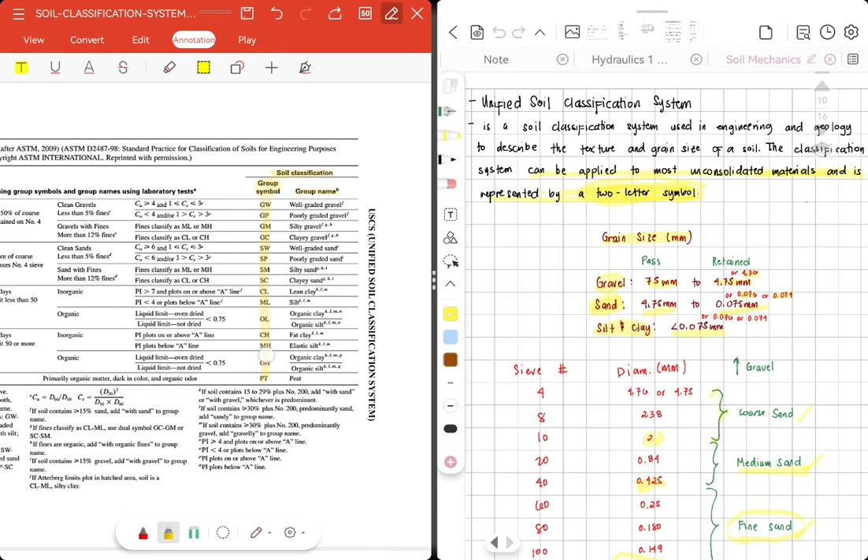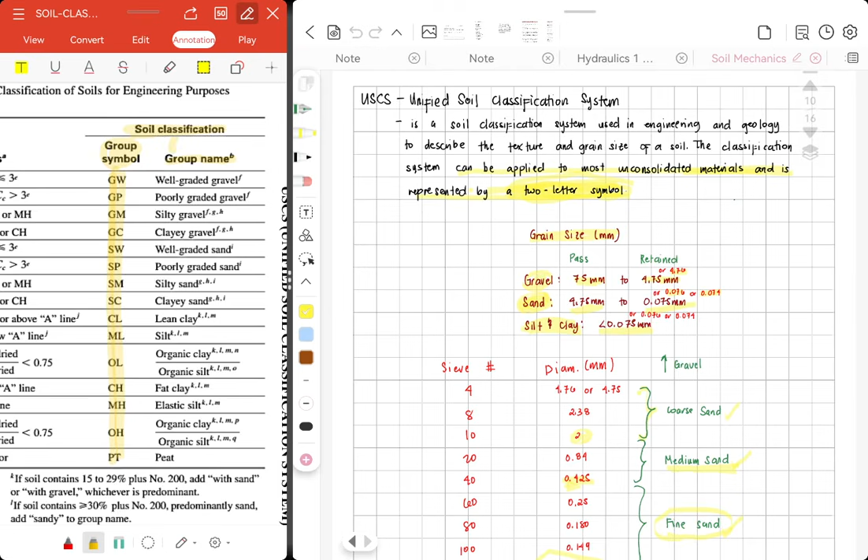So, sa USCS, ang principle ani niya is we have to find first the group symbol and then we can now get the group name. So, kaning group name, it is more specific than the group symbol. So, just like USDA, napud siya iyahang grain size. So, kaniyang grain size is different from USDA.

So, ang nanatay gravel ha, katong USDA kanina wala tay gravel. But sa USCS, nanatay gravel, sand, silt, and clay. So, if mo pass siya 75 mm and mo retained at 4.75 or 4.76, then that is our gravel. And then sa sand, if mo pass siya 4.75 and mo retained siya at 0.075 mm or 0.076 or 0.074, then that is our sand.

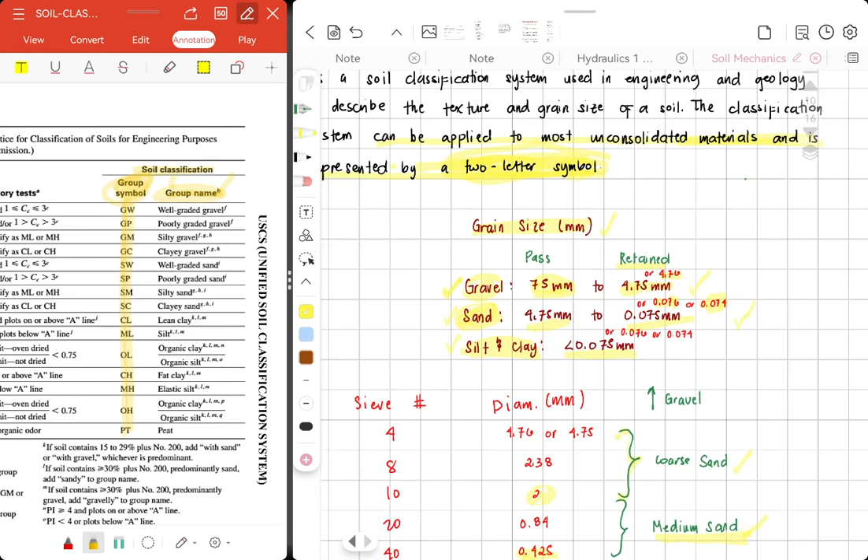For silt and clay, it is less than 0.075 mm. So most likely na siya sa atuang pan. So here is the sieve number and its corresponding diameter. So, naman tayo sand, diba? So, ang sand, it has three types pod, coarse, medium, and fine sand.

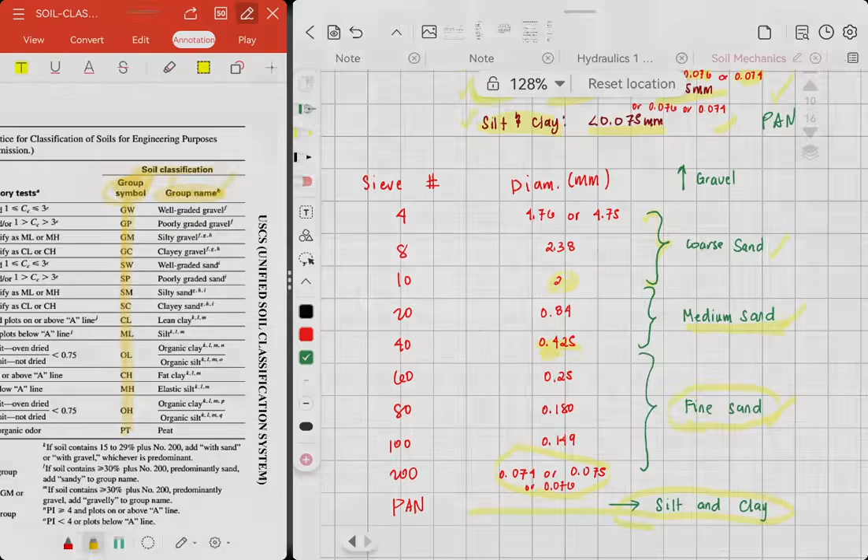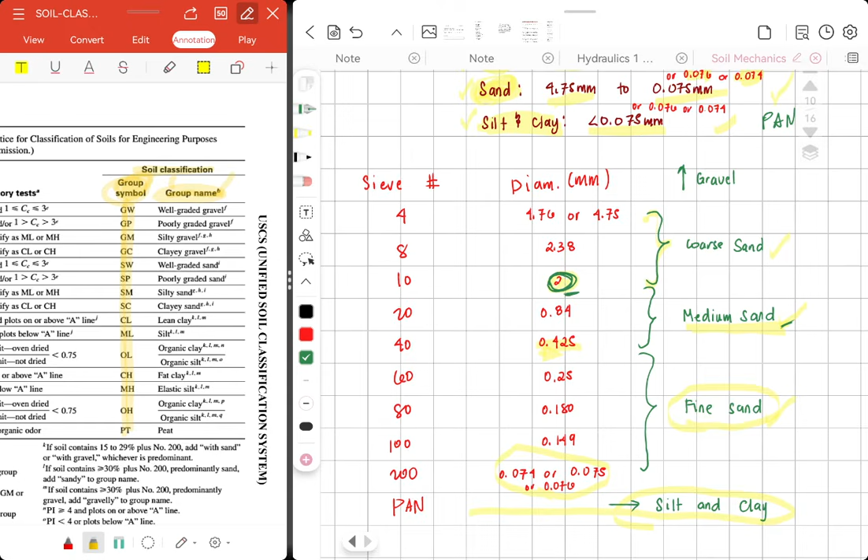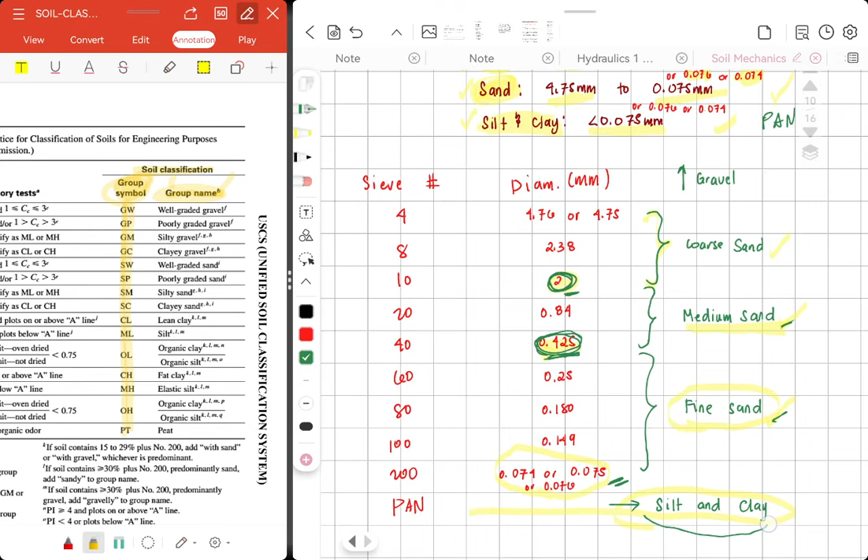So, if mingon tag coarse sand, mo pass through siya dapat at 4.75 but mo retain siya at 2 mm. And then, ato ang medium sand, mo pass through siya sa 2 mm but mo retained at 0.425. Then sa fine sand, mo pass through siya sa 0.425 and mo retained at 0.074. Dayon, ang mo pass through sa number 200, muna na siya ato ang silt and clay. Kuha?

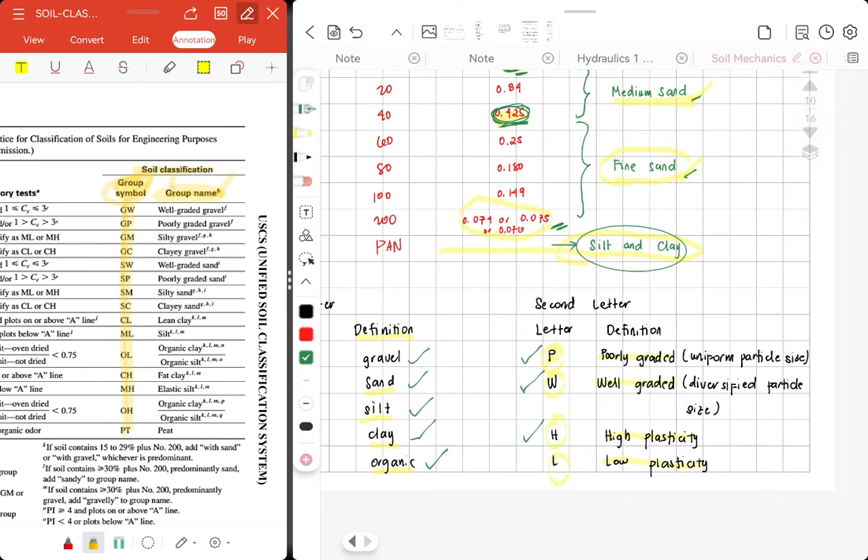So, this is the first letter and second letter for our group symbol. So, first letter, we have G for gravel, S for sand, M for silt, C for clay, and O for organic. So, for the second letter, we have P for poorly graded, W for well graded, H for high plasticity, and L for low plasticity.

So, for example, we have GP. So, unsa man ang GP? Unsa tong G? Gravel. And P is poorly graded. So, therefore, this is poorly graded gravel.

Kuha? Okay. Now, for our data needed, muna siya ang ato ra yung kinahanglan, kaning 7 ka buok. So, if makakuha na ta ning 7 ka buok, then good to go na ta para ma-solve tong mga values natong gipangita. So, for the percent fines, ang meaning aning percent fines kay particles finer than number 200 sieve, or it is the percent passing number 200 sieve. Kuha? So, timan-i ninyo na ha.

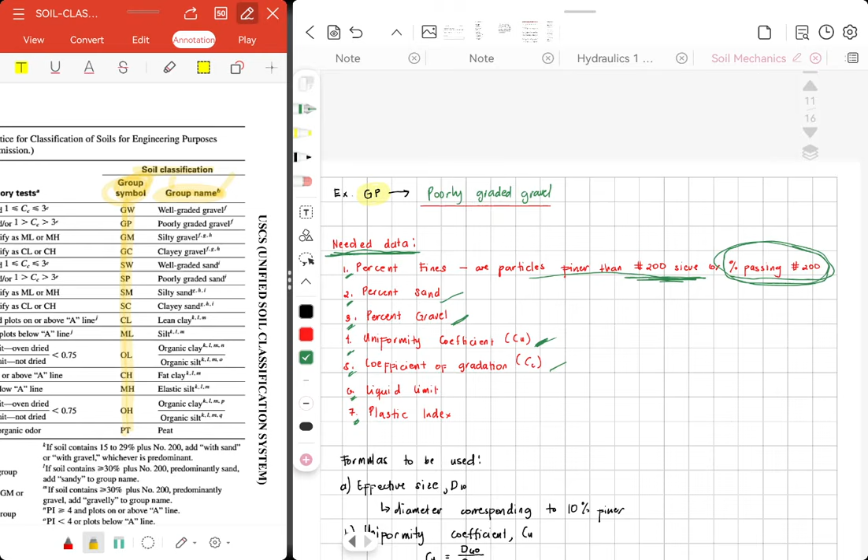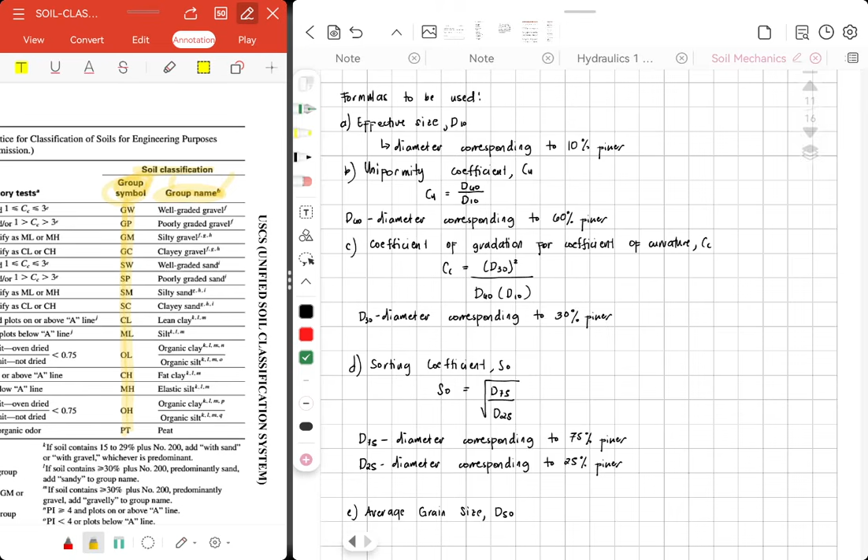And then, we have the percent sand, percent gravel, and then for our uniformity coefficient or CU, coefficient of gradation, CC, liquid limit, and plasticity index. So for formulas to be used, we have 5 formulas. So for effective size or our D10, ang pasabot sa D10 is the diameter corresponding to 10% finer. So it is the diameter corresponding to 10% finer.

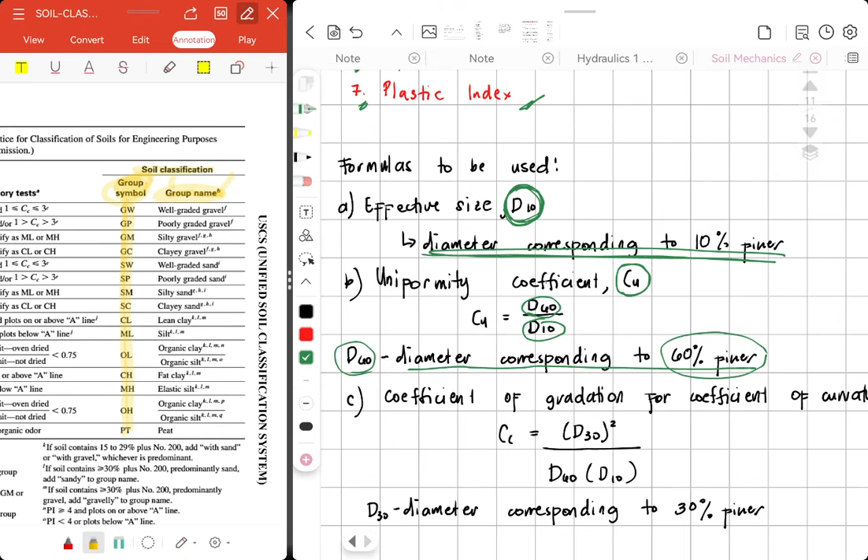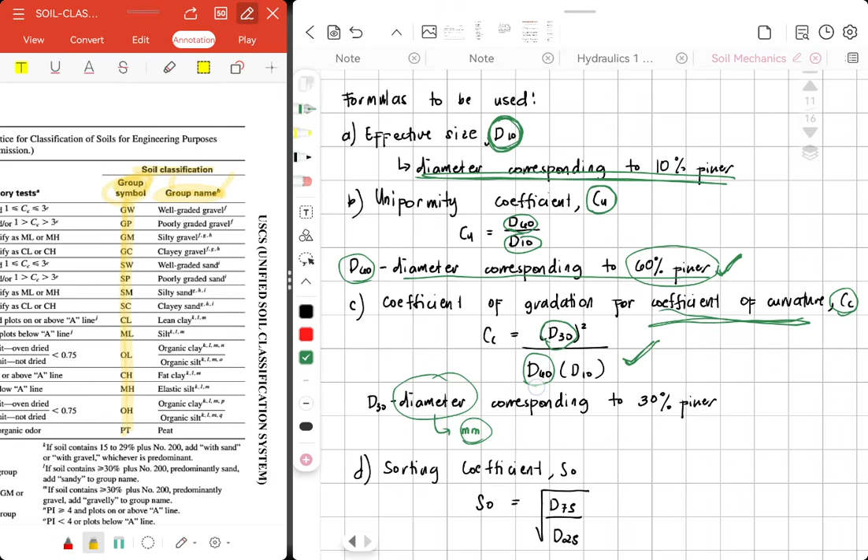For uniformity coefficient or CU, it is D60 over D10. So when we say D60, it is the diameter corresponding to 60% finer. And then for our coefficient of gradation or coefficient of curvature, CC, this is our formula. And then D30 is the diameter corresponding to 30% finer. This could be in any unit, as long as same unit ang ato ang D30, D60, and D10. Ma-cancel out lang man na.

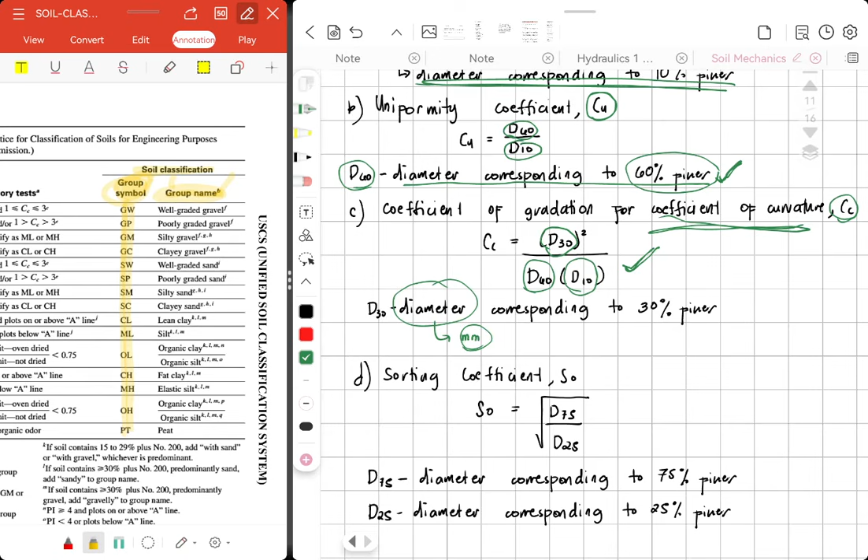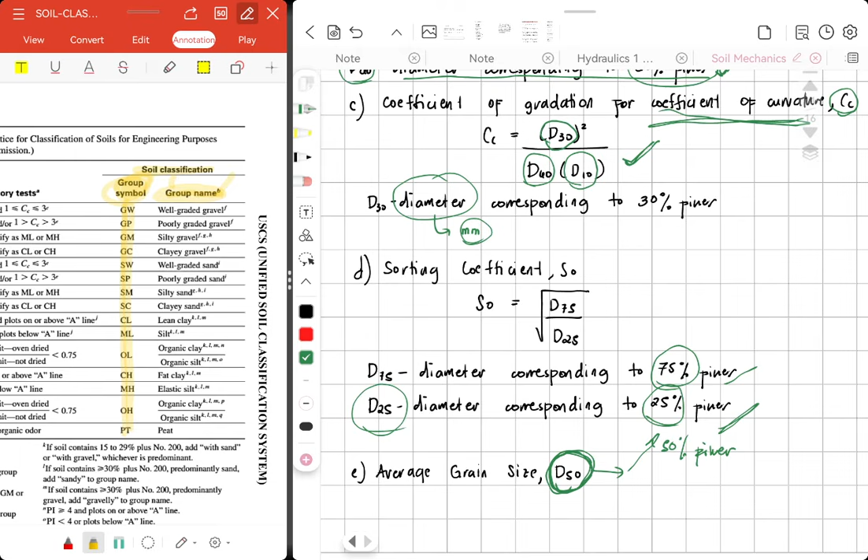And then sorting coefficient or SO. So D75, diameter corresponding to 75% finer, and D25, diameter corresponding to 25% finer. And for our average grain size, that is D50, the diameter corresponding to 50% finer. So mga diameter lang niya atong kwaon: pila ang diameter nga naay 50% finer, or unsa nga diameter ang naay 10% finer. Okay? Let's proceed to example number 1.

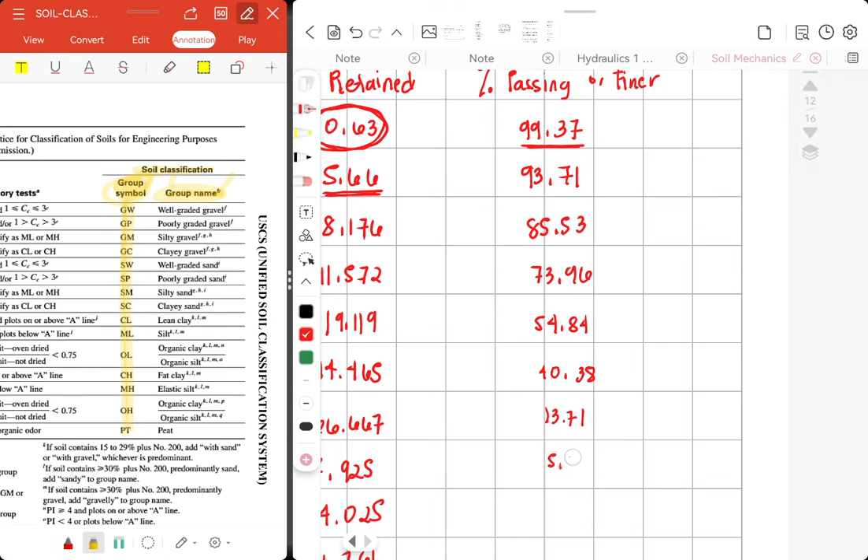Okay? So, if you have questions about percent retained and passing, you may ask me in our GC. So, I'll write it here, class, so it's faster. So, what else? 54.84. So, you have to check if my percent passing or finer is correct. Okay, and then this is 0.

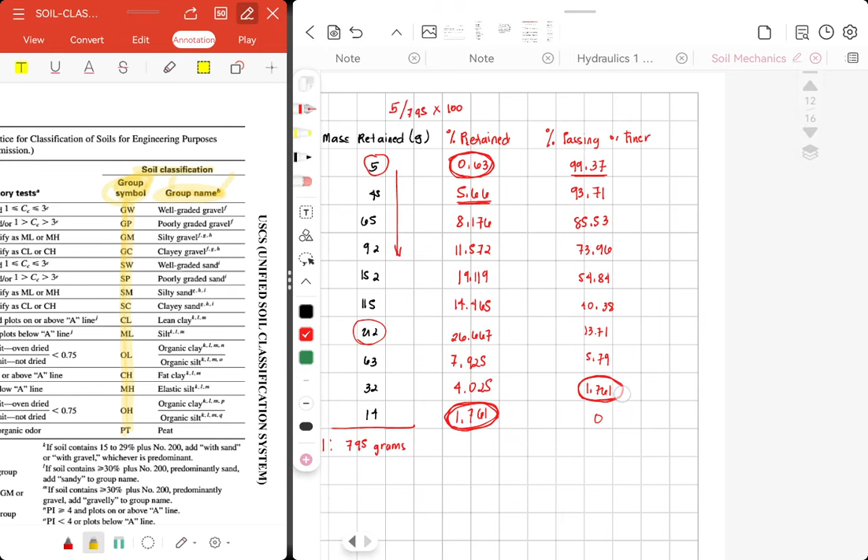So, in order for you to check that your answer is correct, your percent retained on your pan should be equal to your percent finer on the sieve before your pan. Right? Because if 1.761 was retained here, the passing at 200 should be 1.761. Okay? So, the two should be approximately equal. Got it? Okay, next.

The first question, find D10. So, what is D10? When we say D10, it is the diameter at 10% passing or finer. So, as you can see, we look at our percent finer or passing. So, where is the 10% in our passing? There's no 10%. So, what if there's no 10%?

Okay, so we have to use interpolation. So, we put 10 here. What we're looking for, class, is the diameter at 10% finer. So, since 10% finer is what we're looking for, we write 10% finer there. So, the corresponding diameter, 0.180, D10, 0.149, then 13.71, 10%, 5.79. So, it's in between, that's why we put the 10 here.

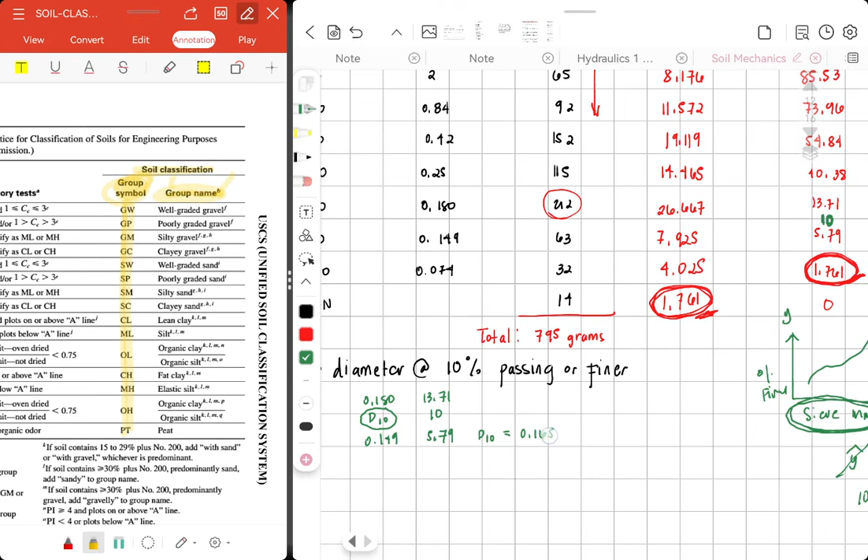Okay? Sige. So, kanina itong magamiton ha. Kaya nga itong na kay in x direction man. This is our y since this is our percent finer. Kani. This is percent finer in y direction. And this is x because it is in sieve number in mm. Okay, so makita ani na graph. Kani nga graph atong basihan.

Kuha. So, mugamit tag x hat, it is because ang x na value atong gipangita, which is ang D10. So, this is our D10. So, that is our final answer. D10.

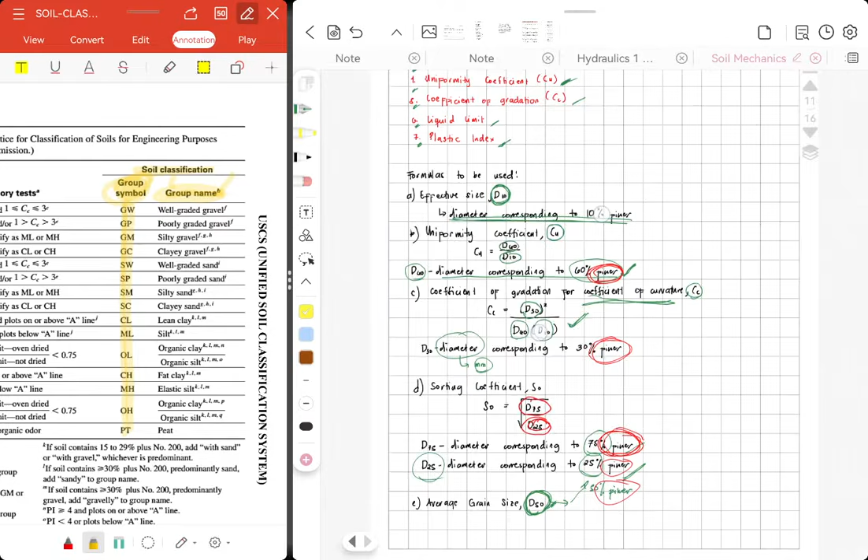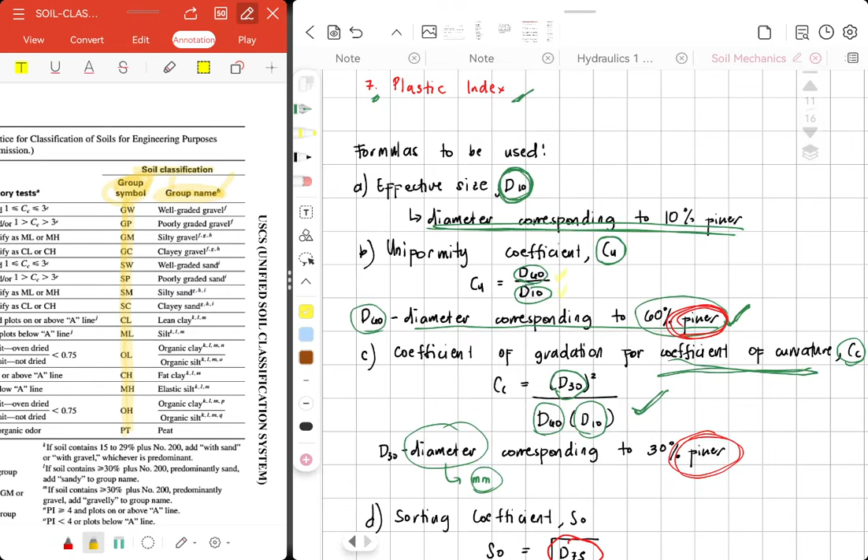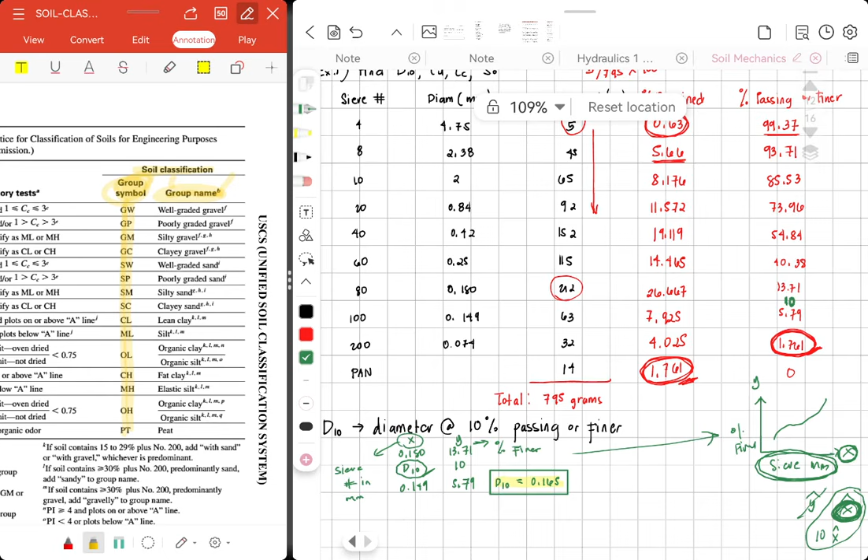Okay, next is CU. So, what is the formula of CU? So, we have D60 and D10. Since na naman tayo D10, so, ato nang tuwaon ato ang D60. So, mingutag D60, it is diameter at 60% passing. Natay 60% passing, diri wala. So, wala. So, we have to interpolate again. So, 60%. So, diri siya sa tunga. Sa 73 and 54.

So, if you are about to interpolate that, atong D60 is pilatong D60. This should be 0.506. Okay? Kamo na ibala. Saan na nyo pag-interpolate? Basta kay mo ni siya answer using logarithmic interpolation.

Sige, sunod. So, we can now get the CU. CU is equal to D60 over D10. So, pilatong D60? 0.506 all over 0.165. So, if na ko isayo class, ignore ko ha. Pila man eh. 0.506 over 0.165. So, our CU is, wala CU ano? Okay, basta. So, atong CU is 3.0667. Okay, that is the value for our CU. So, this is our final answer.

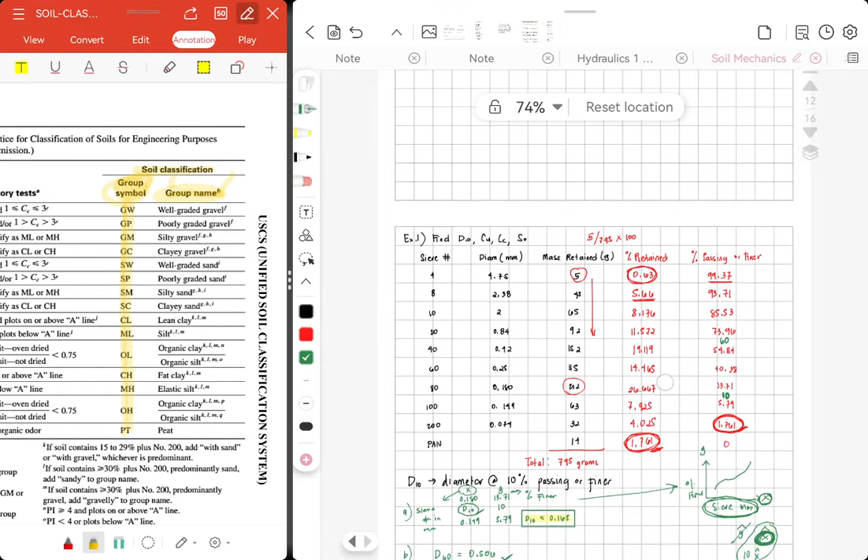Okay, next. CU and then, CU, saan to? CC. So, this is our letter A. This is our letter B. For our CC, what is the formula for our CC? So, muna ya, kani, CC. So, formula sa CC, D30 squared over D60 times D10. So, D30 na po atong kulang. So, to get D30, we have to get its diameter at 30%. Ilan man ang diameter at 30%? Asa man nato ni siya ibutang?

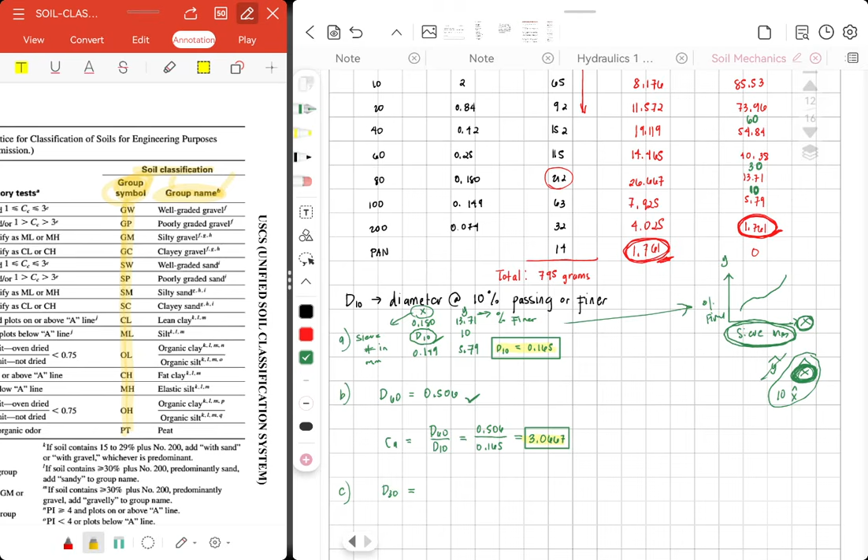So, dire, in between sa 40 and 13. Yeah. That is our D30. So, using interpolation again, pila itong D30? So, D30 is 0.22. Okay, that's

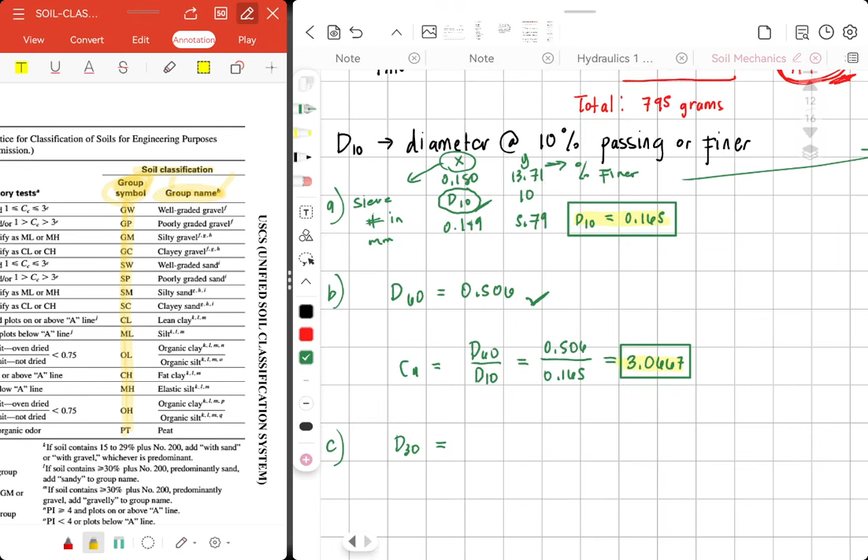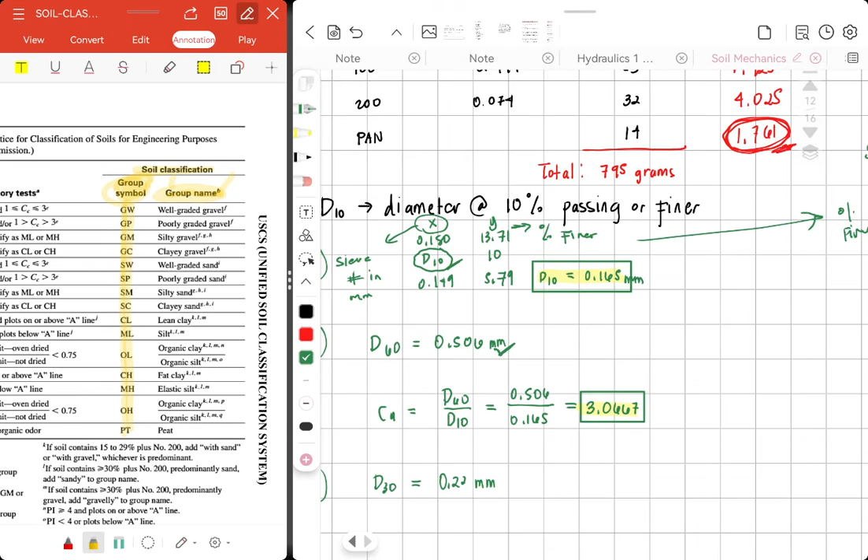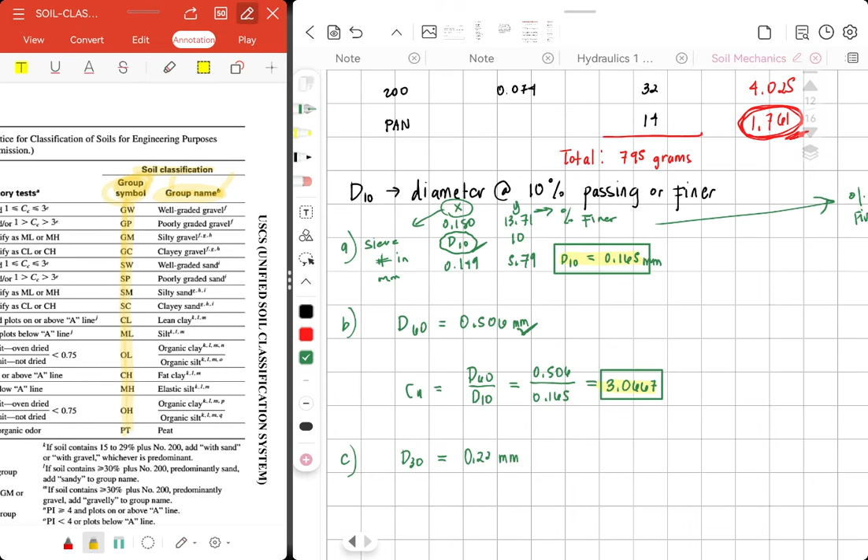so naatay D30 na 0.22. So, ni sila sa mm. Ang atong mga D10, D60, D30 in mm kay diameter man na. Kung na siya diameter nga na ay 30% passing. 0.22. Now, let's get our CC.

So, CC is equal to D30 squared over D60 times D10. So, pila man eh. D30 is 0.22 squared over D60, which is 0.506, times D10, 0.165. Oops. So, pila man eh. We have our CC is, ano ko answer? Okay, so I don't, basta i-check ninyo ha. So, dapat pareha tayo. Pilay value na to dire.

Okay, so this is sa pila ni? So this is 0.580. So that is our CC. This is our final answer.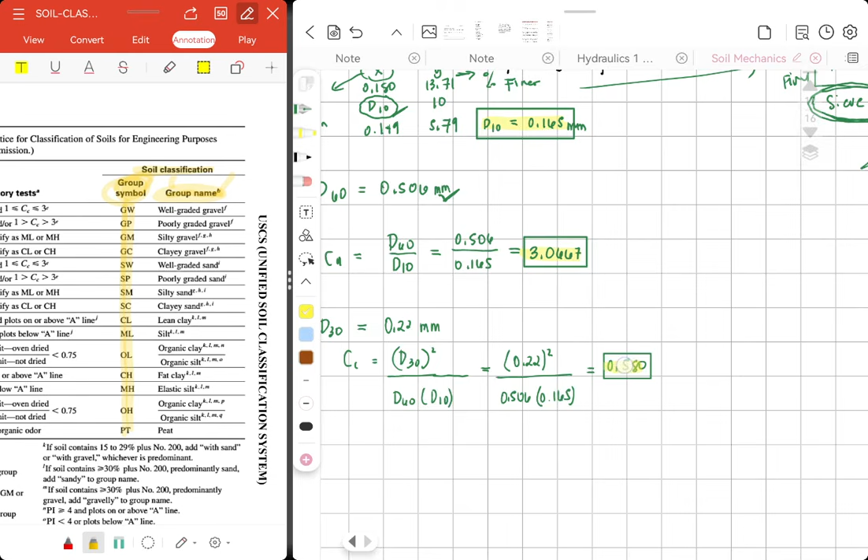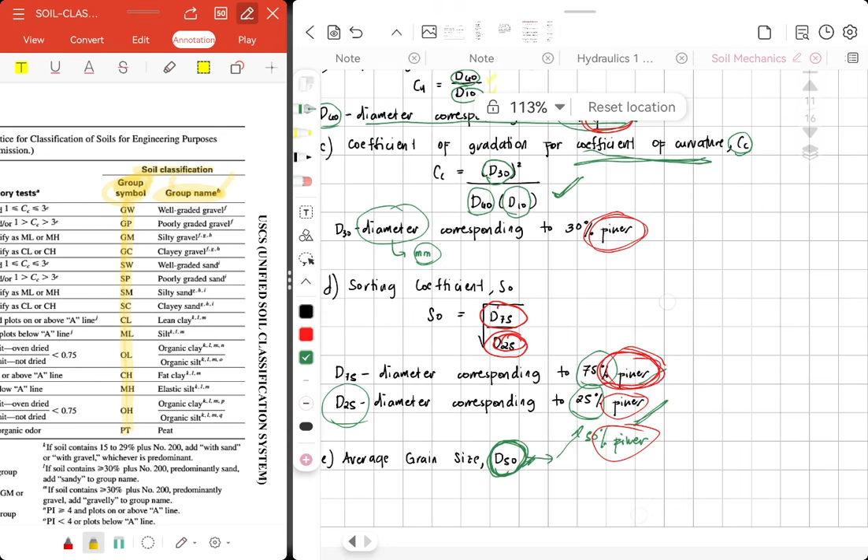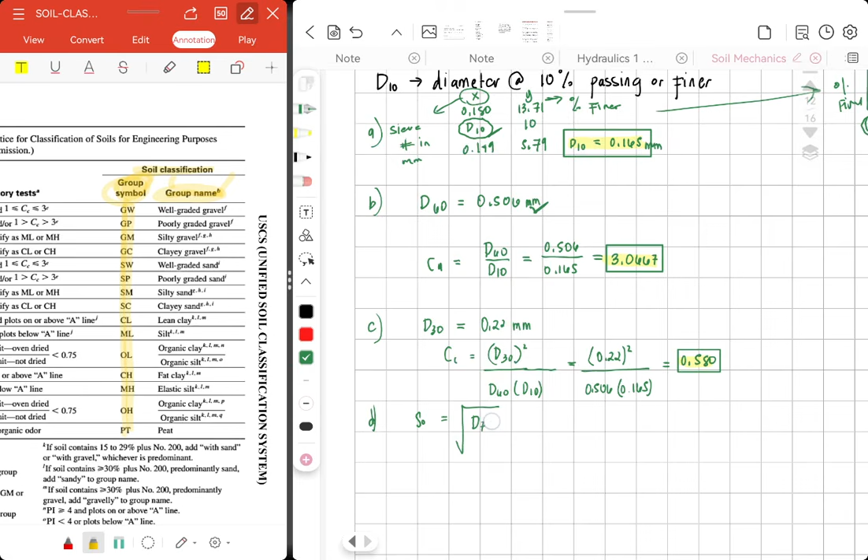Okay. Now for letter D, what is asked in letter D? SO. So what is the formula for SO? D75 and D25. So square root. So when you say SO, it is square root of D75, ito ba? And over D25. So pangitaw na po dato is diameter at 75% passing. So, pilay diameter daw at 75% passing. So, asa na ito ibutang ang 75? Dire, in between 85 and 73.

So, interpolation again. So, atong D75, your answer should be... Wait, asa man eh? So, D75 should be 0.908. Okay, let's check. Sakto ba ni? You have to interpolate, ha? Okay, 0. Sige, this is correct.

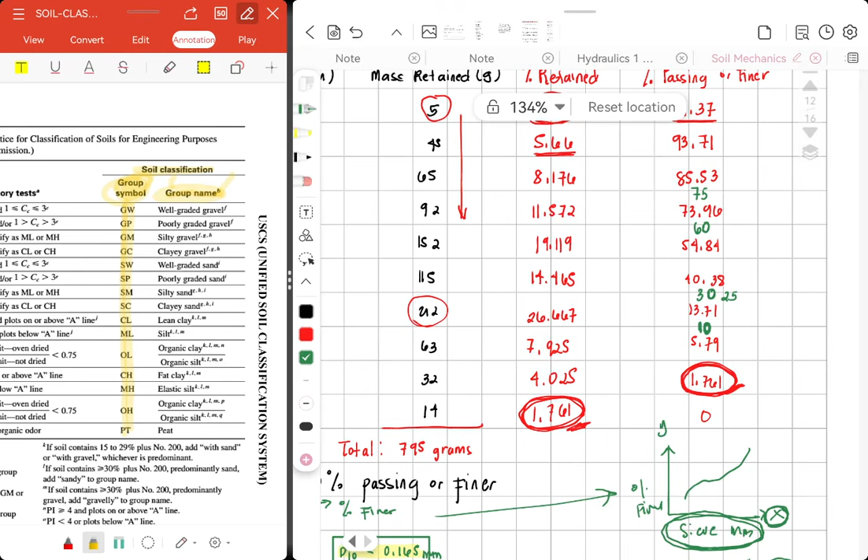Mm. Then for D25, diameter at 25% passing. Asa man nato ibutang na atong 25% passing? So in between 40 and 13. So natay 25 here. So kani atong interpolate kana. So your answer should be D25 should be equal to, wait, asa ko D25? So 0.207 mm. So kana.

Sige. Now we can now substitute to get our SO. 0.908 over 0.207. So SO is equal to the square root of 0.908 over 0.207. So SO is 2.094. So this is our final answer. So if I have kanang nangasipyat nga answer class, then just tell me, ha.

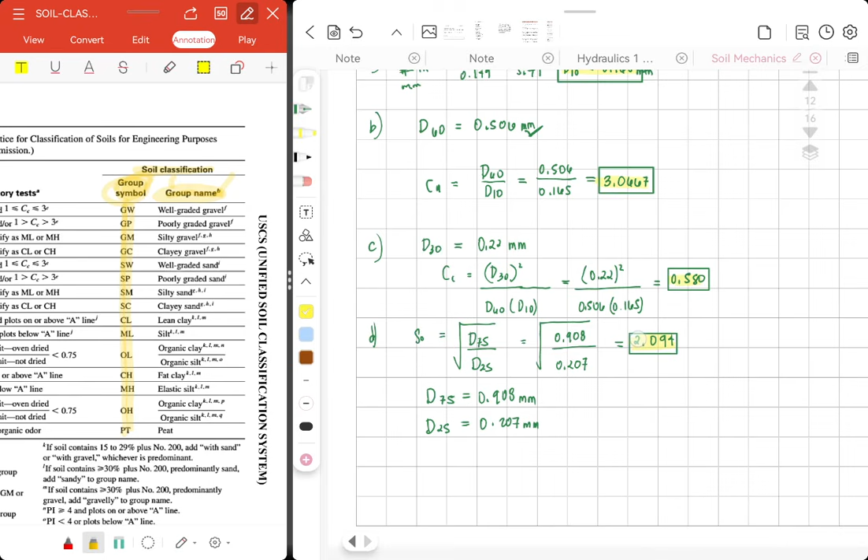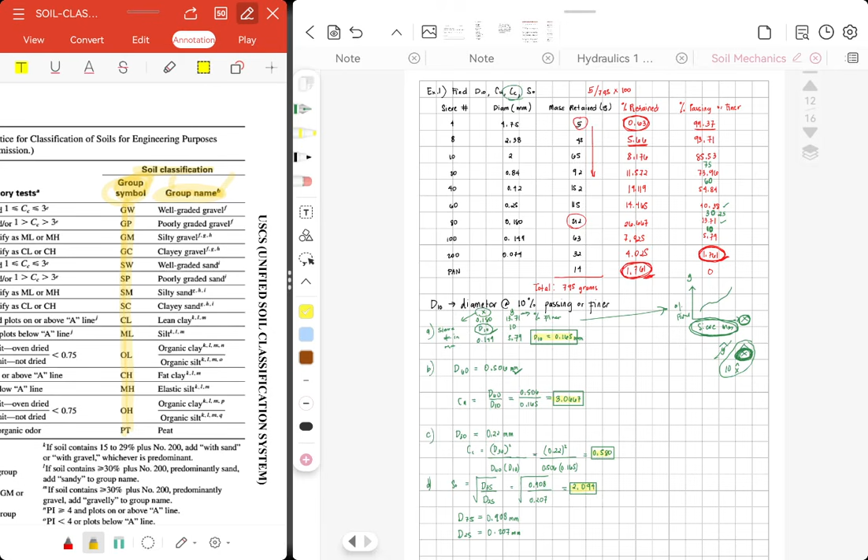So, if mingon tag D10, it is the diameter at 10% finer or passing. If D60, diameter at 60% finer. If D30, diameter at 30% finer. And D75, diameter at 75% finer. D25, diameter at 25% finer. Kuha using logarithmic interpolation. Sige. Okay, now let's move on to our next example.

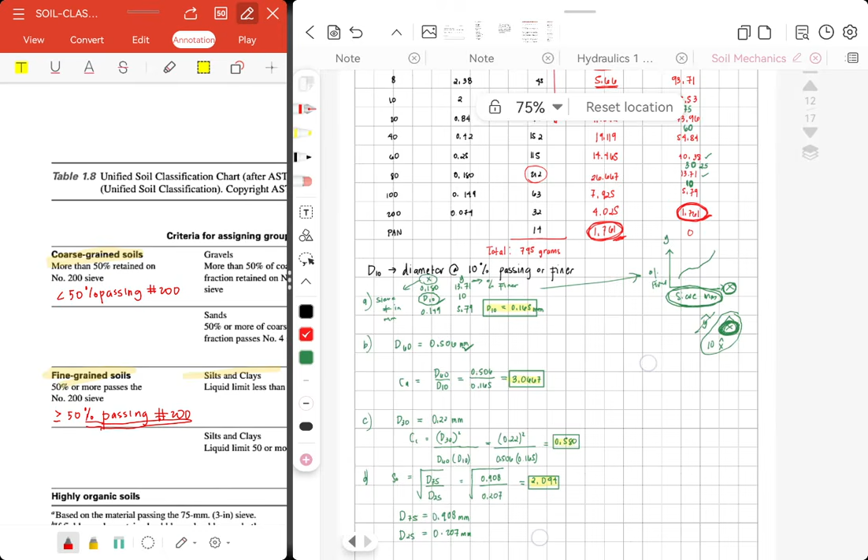Okay, so nani siya, ang needed data na to ato is 7 ka buok. So kompleto na ta. We have 7. We have our PI, percent fines, percent sand, gravel, CU, CC, and liquid limit.

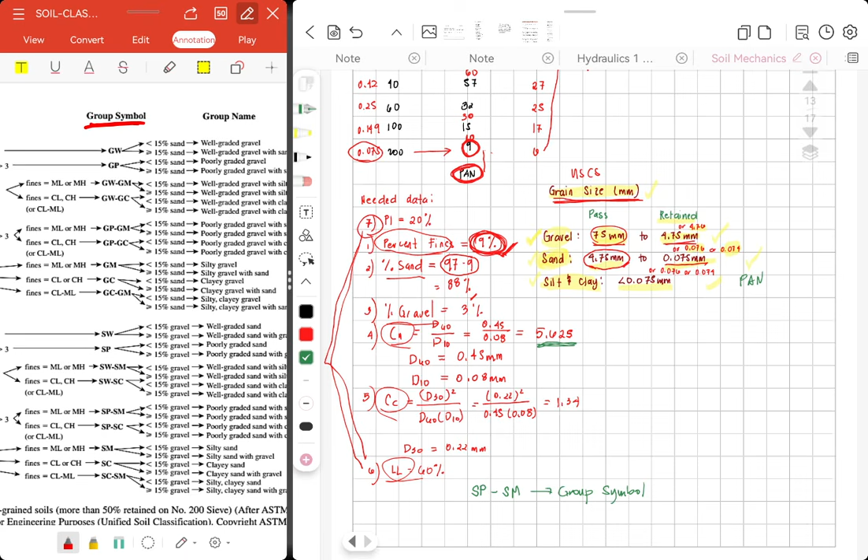Two classifications. So, first we compare our percent of gravel. What is the percent of our gravel? 3%. So, if we have 3%, is it less than or greater than or equal to 15%? So, that is less than 15% gravel. So, therefore, where is the less than? So, if it is less than, our soil is poorly graded sand with silt. Okay, so this is our group name. So, our final answer is this.